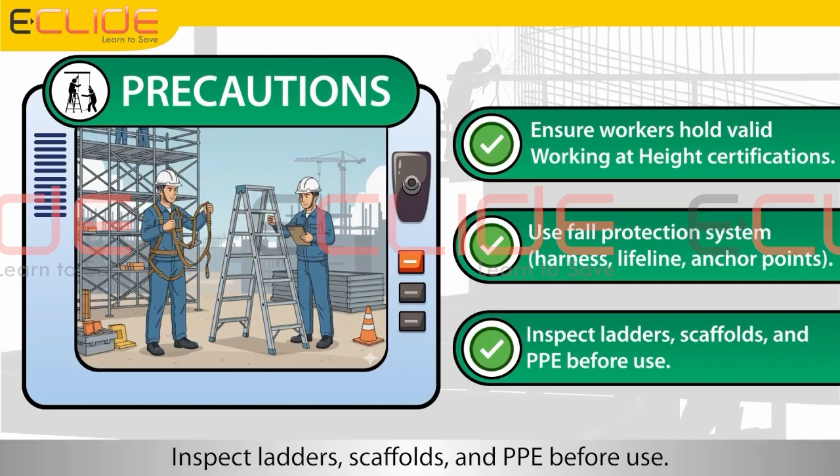Thank you, John, for explaining the hazards. Let us now understand about the precautions during working at height. Ensure workers hold valid working at height certifications. Use fall protection system, harness, lifeline, anchor points. Inspect ladders, scaffolds, and PPE before use. Ensure guardrails and toe boards are in place. Keep working surfaces clean and dry. Secure tools and materials to prevent falling objects. Avoid working at height in bad weather. Provide training and supervision for workers. Ensure proper lighting and visibility. Ensure a dedicated rescue team on standby. Maintain clear communication system. Follow permit to work system for high-risk tasks.

Now we will understand about do's and don'ts during working at heights, and we can carry out the work safely. To begin, John, can you explain about various do's? Yes, Lisa, let me explain about the do's during working at height.

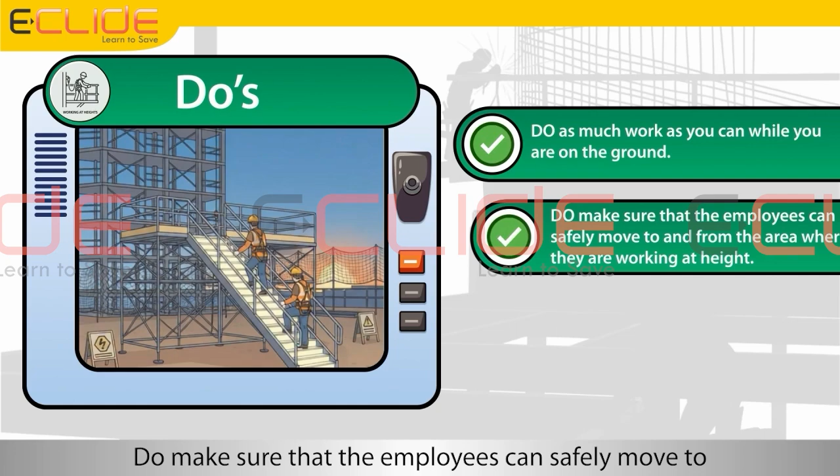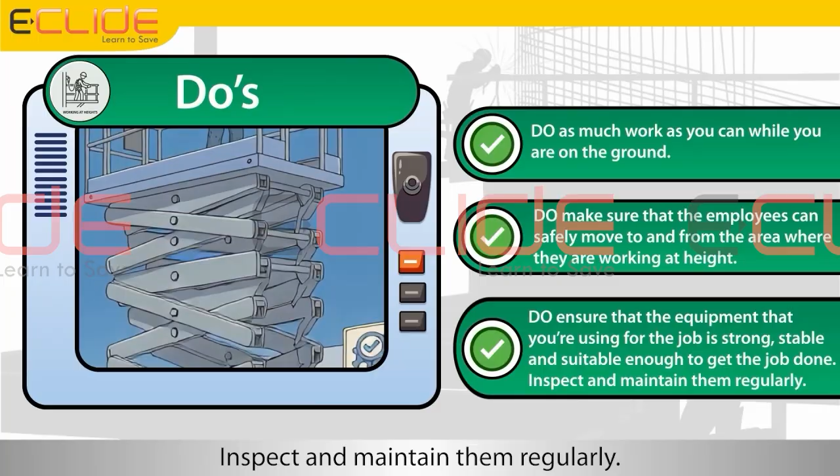Do as much work as you can while you are on the ground. Do make sure that employees can safely move to and from the area where they are working at height. Do ensure that the equipment you're using for the job is strong, stable and suitable enough to get the job done. Inspect and maintain them regularly. Do be careful when working near a fragile surface. Do ensure that you are protected from falling objects. Do make preparations for emergency evacuations and rescues.

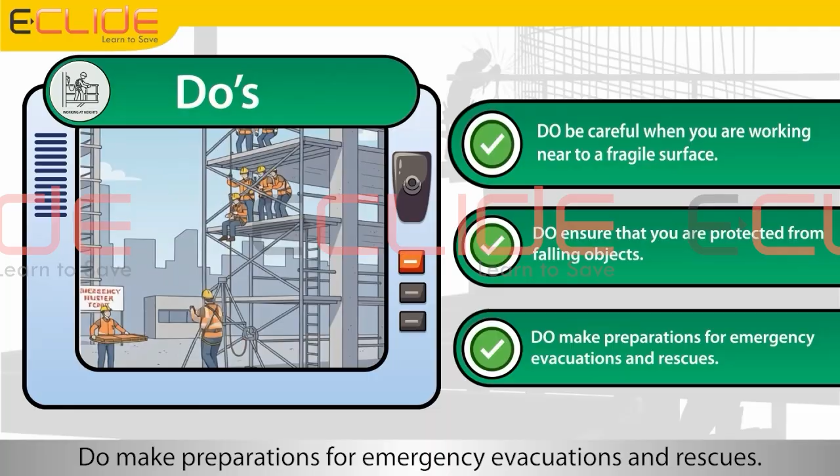Thank you, John, for explaining the do's. Let us now understand about the don'ts during working at heights.

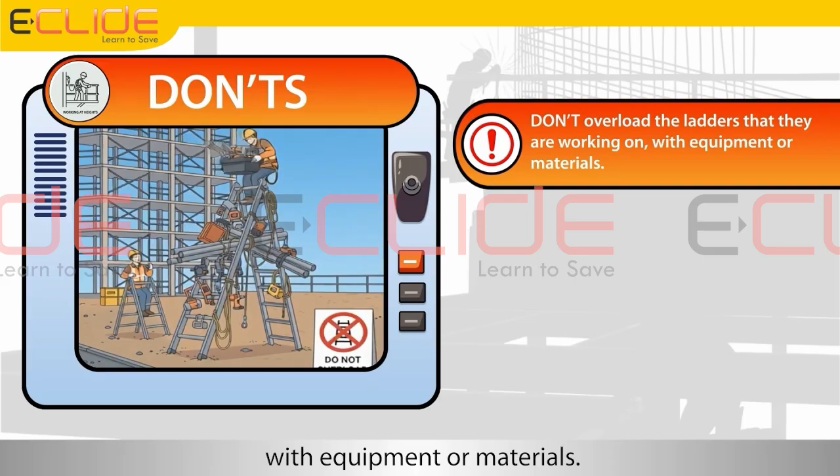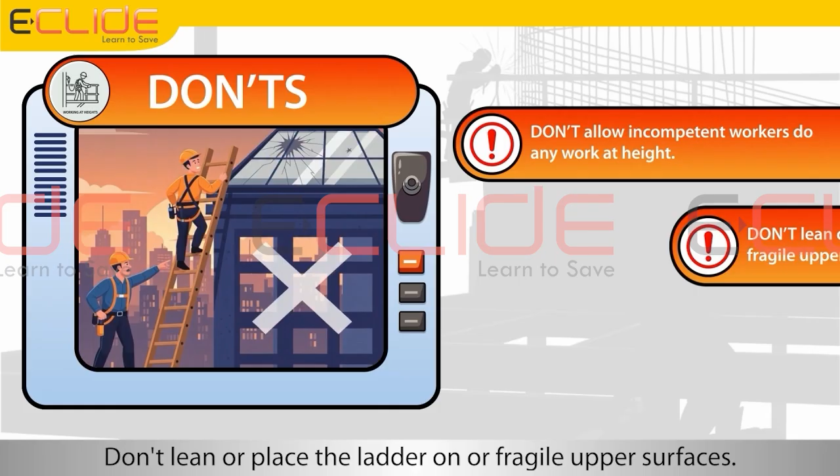Don't overload the ladders that you are working on with equipment or materials. Don't try to reach too far when you're on a ladder or stepladder. Don't use ladders or stepladders to do work that entails heavy or strenuous tasks. Only use them to do work that's quick and light. Don't allow incompetent workers to do any work at height. Don't lean or place the ladder on fragile upper surfaces. Don't stay quiet when you feel someone is compromising their own safety or the safety of others.

Hey, John, now we will learn how to stay safe during excavation and trenching work. Yes, Lisa, let's start first with hazards and precautions of excavation and trenching work. Let us learn how to stay safe during work involving digging, trenching, or excavation near pipelines, cables, or underground utilities. We will understand about hazards and precautions during excavation and trenching safety, and we can carry out the work safely. To begin, John, can you explain about various hazards?

Yes, Lisa. Let me explain about the hazards during excavation and trenching. Collapse of trench walls, cave-ins. Contact with underground utilities, gas, electricity, water. Falling objects or materials into excavation. Hazardous gases or oxygen deficiency in deep excavations. Flooding from groundwater or rain. Workers or equipment falling into trench. Heavy equipment operating too close to edge. Vibration from traffic causing collapse. Poor access or egress, no safe ladders or ramps. Inadequate shoring, shielding, or trench support. Lack of inspection by competent person.

Thank you, John, for explaining the hazards. Let us now understand about the precaution during excavation and trenching.

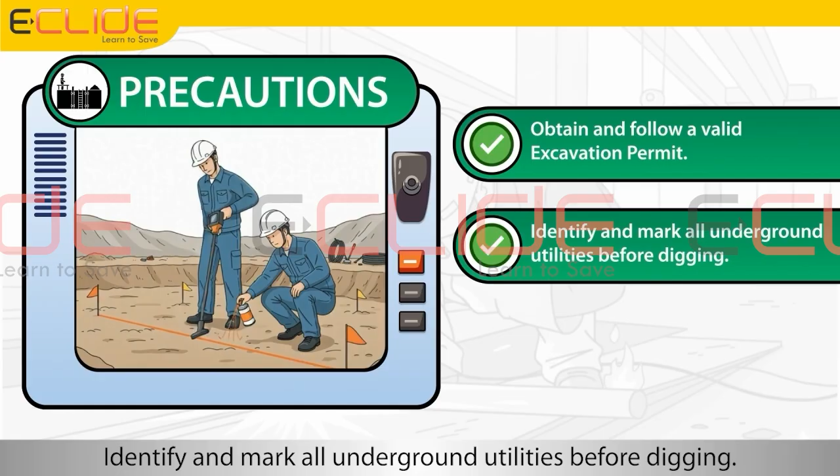Obtain and follow a valid excavation permit. Identify and mark all underground utilities before digging. Provide proper shoring, shielding, or benching. Keep excavated materials at least 1 meter from trench edge. Test atmosphere for hazardous gases or oxygen levels.

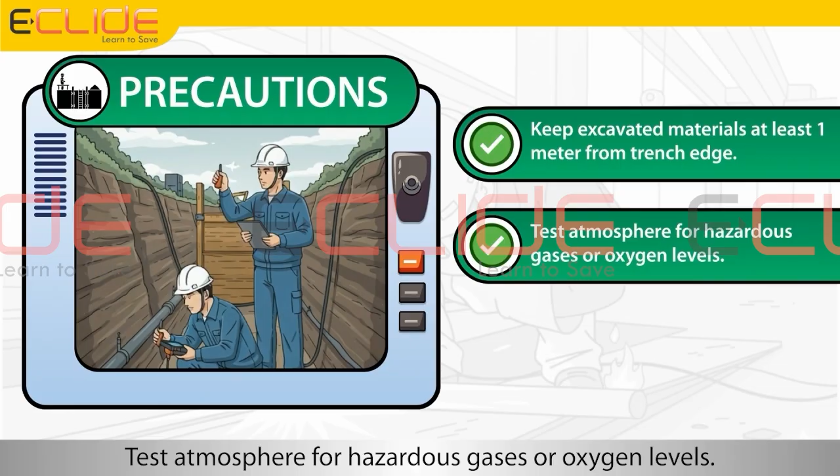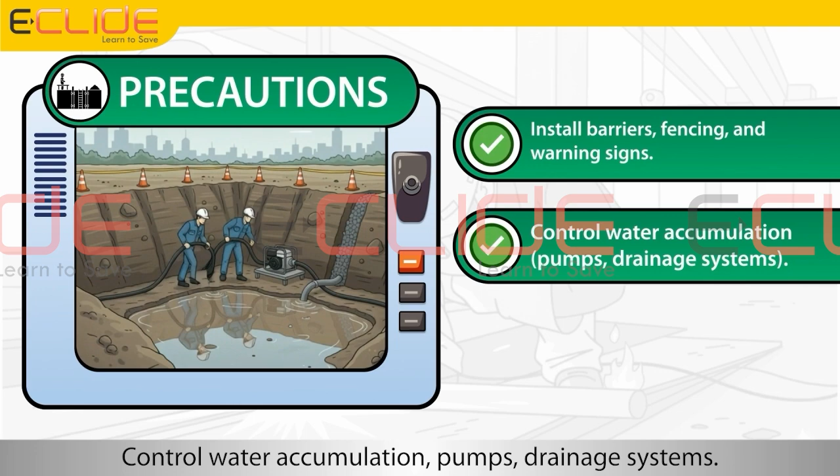Provide safe access or egress every 7.5 meters. Install barriers, fencing, and warning signs. Control water accumulation with pumps and drainage systems. Maintain safe distance of heavy equipment from edges. Conduct frequent inspections by a competent person. Provide proper PPE and prepare an emergency or rescue plan.

Now we will understand about do's and don'ts during excavation and trenching, so we can carry out the work safely. To begin, John, can you explain about various do's? Yes, Lisa, let me explain about the do's during excavation and trenching.

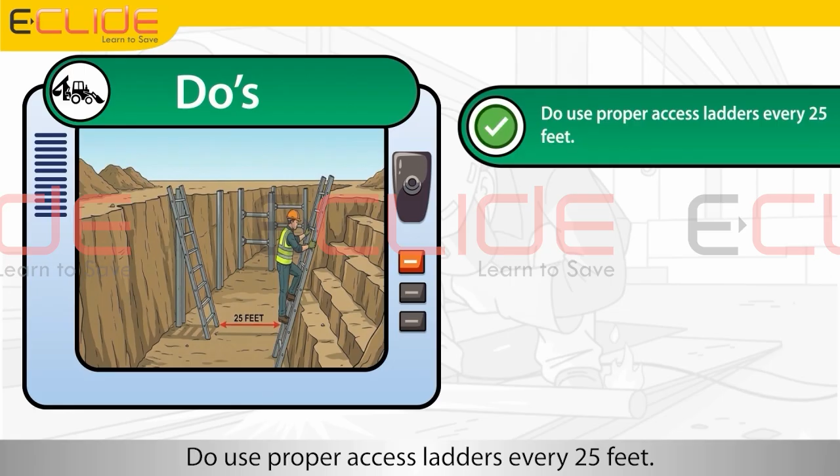Do inspect trenches daily before work. Do use shoring, shielding, or benching. Do keep spoil piles 2 feet from edges. Do use proper access ladders every 25 feet. Do check for water accumulation. Do identify underground utilities before excavation. Do assign a competent person for supervision.

Thank you, John, for explaining the do's. Let us now understand about the don'ts during excavation and trenching safety use.

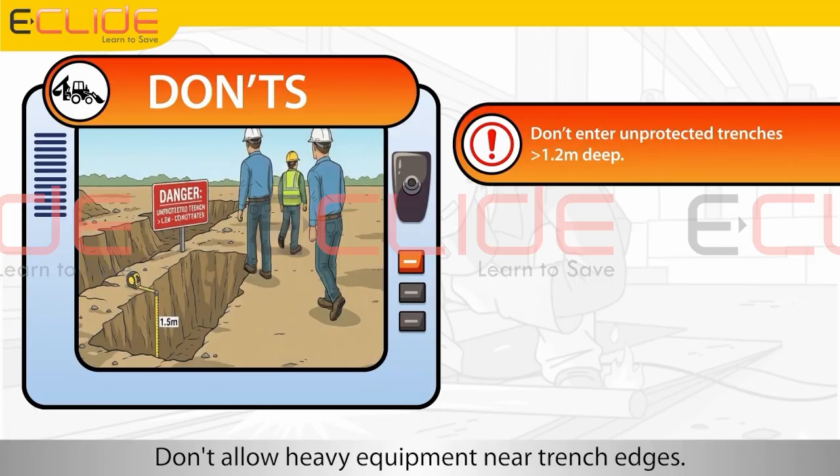Don't enter unprotected trenches greater than 1.2 meters deep. Don't allow heavy equipment near trench edges. Don't ignore cracked or sloughing soil. Don't jump across trenches. Don't allow workers to stand under loads. Don't store materials at the edge of trenches. Don't work during heavy rain in open trenches.

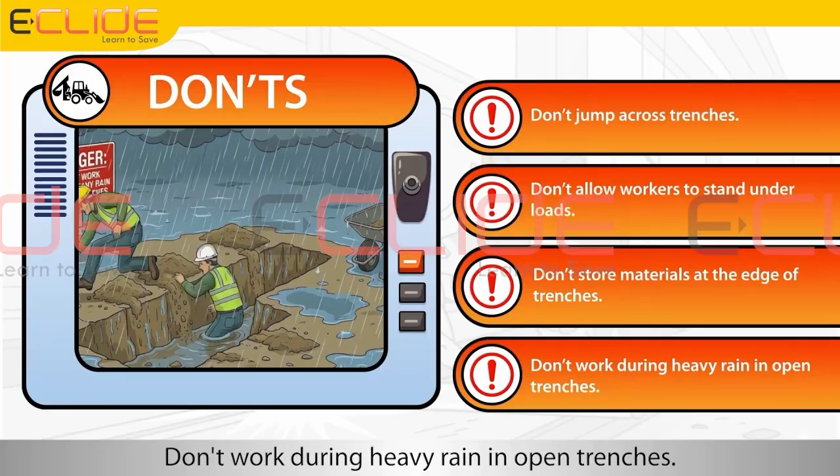John, now let's learn how to stay safe during ladder use. Yes, Lisa, let's begin with hazards and precautions of ladder use. We will understand about hazards and precautions during ladder use, so we can carry out the work safely. To begin, John, can you explain about various hazards? Yes, Lisa, let me explain about the hazards during ladder use.

Ladder slipping due to unstable surface. Overreaching causing falls. Using damaged or defective ladders. Electrical contact when using metal ladders. Falling objects from height.

Thank you, John, for explaining the hazards. Let us now understand about the precaution during ladder use.

Ensure the ladder is placed on firm, level ground. Maintain 3-point contact at all times. Inspect the ladder for cracks, loose rungs, or defects before use. Keep ladder angle at a 4:1 ratio. Use a non-conductive ladder near electrical work. Do not overreach, move the ladder instead. Secure the ladder at the top where possible.

Now we will understand about do's and don'ts during ladder use, so we can carry out the work safely. To begin, John, can you explain about various do's? Yes, Lisa, let me explain about the do's during ladder use.

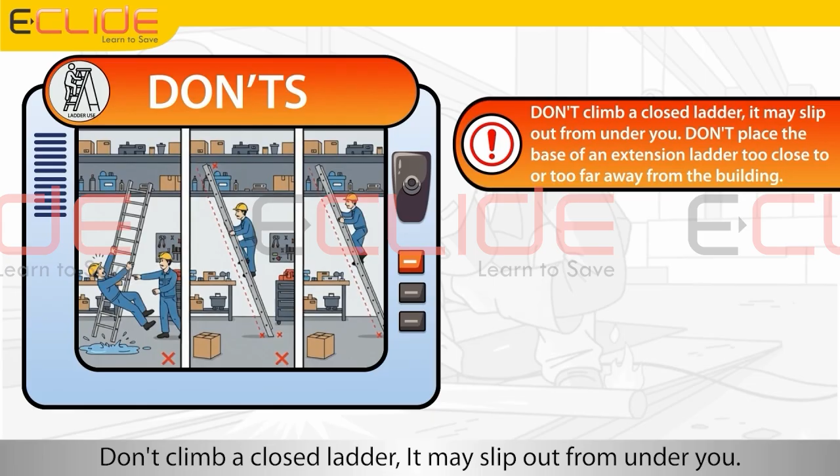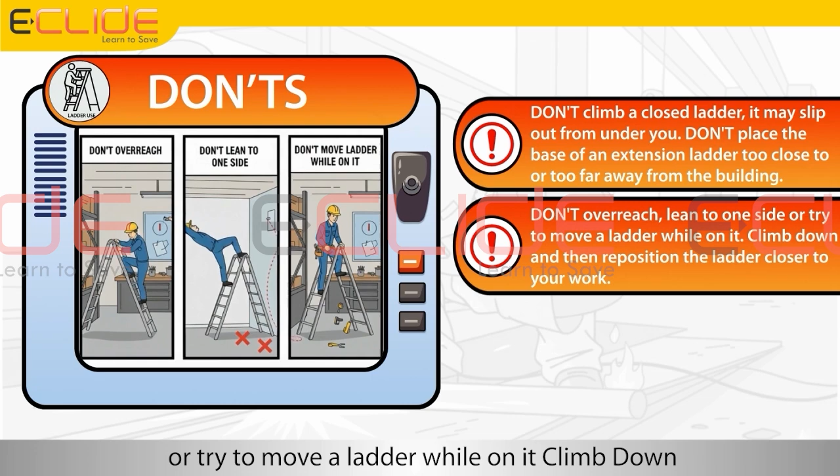Don't climb a ladder if you are not physically and mentally up to the task. Don't climb a closed ladder, it may slip out from under you. Don't place the base of an extension ladder too close to or too far away from the building. Don't overreach, lean to one side, or try to move a ladder while on it. Climb down and then reposition the ladder closer to your work.

Don't exceed the maximum load capacity or duty rating of a ladder. Don't permit more than one person on a stepladder or an extension ladder.

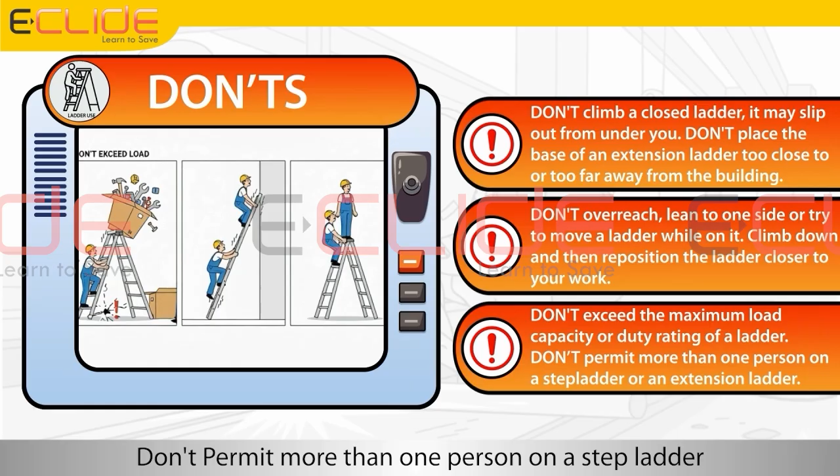John, now let's understand how to stay safe during confined space work. Yes, Lisa. Let's start with hazards and precautions of confined space work. Let us learn how to stay safe during any area with limited entry or exit not designed for continuous occupancy, for example tanks, silos, sewers. We will understand about hazards and precautions during confined space work, and we can carry out the work safely. To begin, John, can you explain about various hazards?

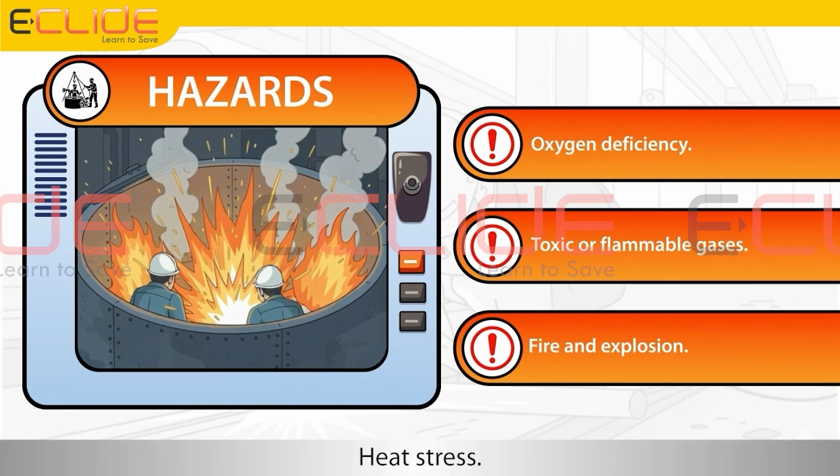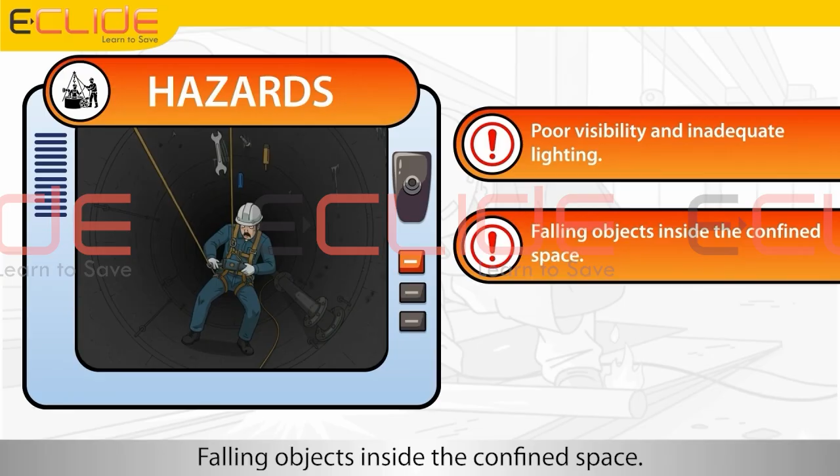Yes, Lisa. Let me explain about the hazards during confined space: oxygen deficiency, toxic or flammable gases, fire and explosion, heat stress, limited movement or entrapment, noise and vibration, poor visibility and inadequate lighting, falling objects inside the confined space, slips, trips, and falls, panic or disorientation due to poor communication.

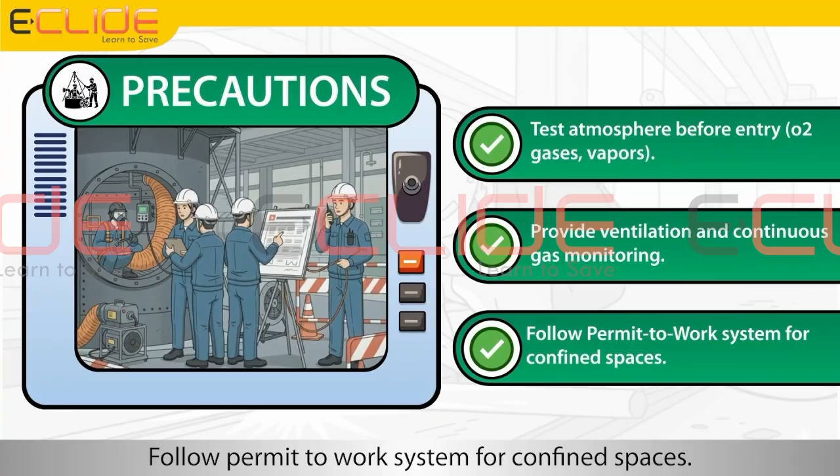Thank you, John, for explaining the hazards. Let us now understand the precautions during confined space work. Test the atmosphere before entry: O2, gases, vapors. Provide ventilation and continuous gas monitoring. Follow the permit to work system for confined spaces.

Now we will understand the do's and don'ts during confined space work, so we can carry out the work safely. To begin, John, can you explain about various do's? Yes, Lisa, let me explain about the do's during confined space work.

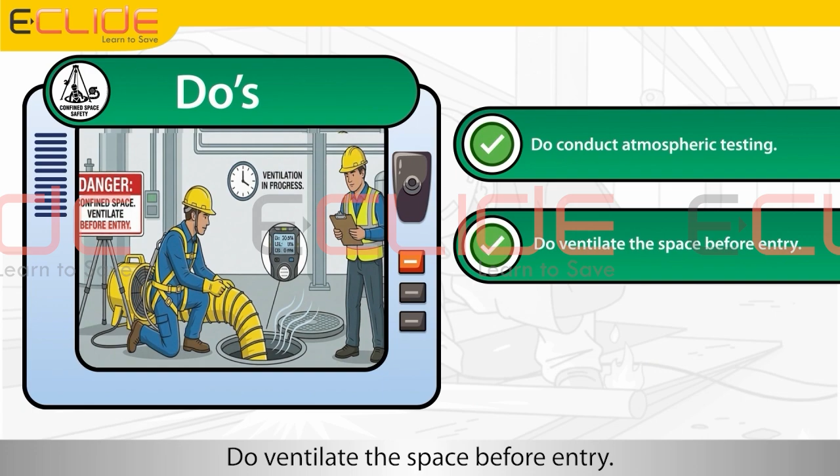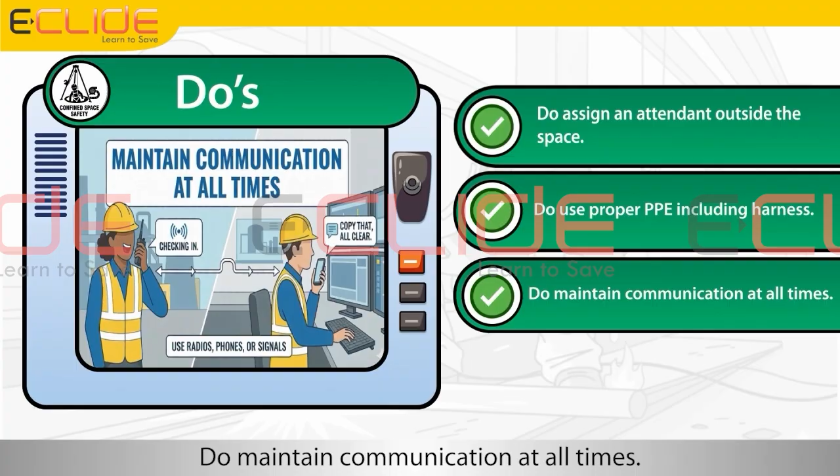Do conduct atmospheric testing. Do ventilate the space before entry. Do use an entry permit system. Do assign an attendant outside the space. Do use proper PPE including harness. Do maintain communication at all times. Do have rescue equipment ready. Thank you, John, for explaining the do's.

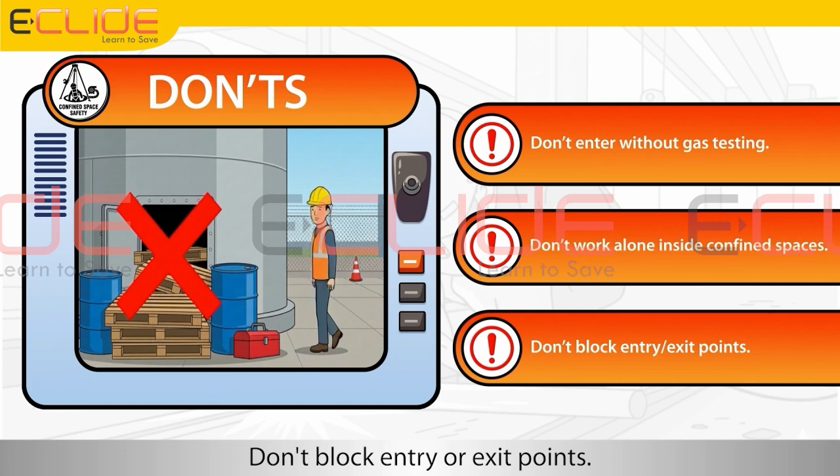Let us now understand the don'ts during confined space safety. Don't enter without gas testing. Don't work alone inside confined spaces. Don't block entry or exit points. Don't ignore alarms or detector readings. Don't remove ventilation during work. Don't use ignition sources in flammable spaces. Don't exceed occupancy limits.

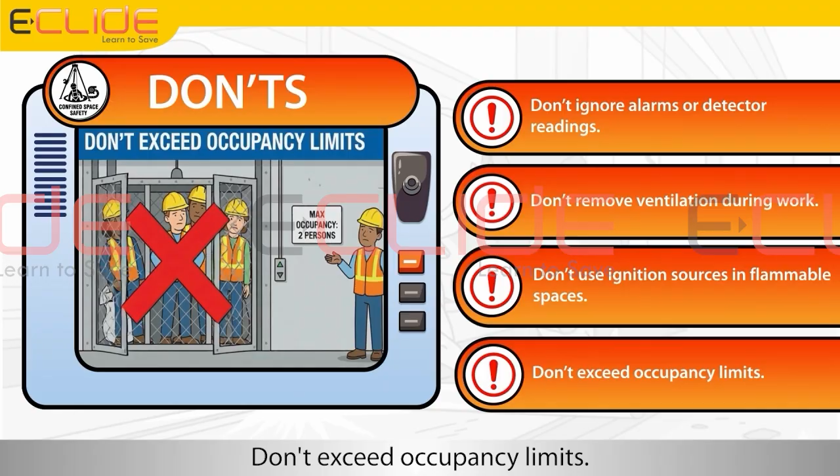Hey, John, let's understand now about how to stay safe during lifting operation work. Yes, Lisa. Let's start with hazards and precautions of lifting operation work. Let us learn how to stay safe during lifting operations, any operation using crane, hoist, or lifting equipment to move a load. We will understand about hazards and precautions during lifting operations, and we can carry out the work safely. To begin, John, can you explain about various hazards?

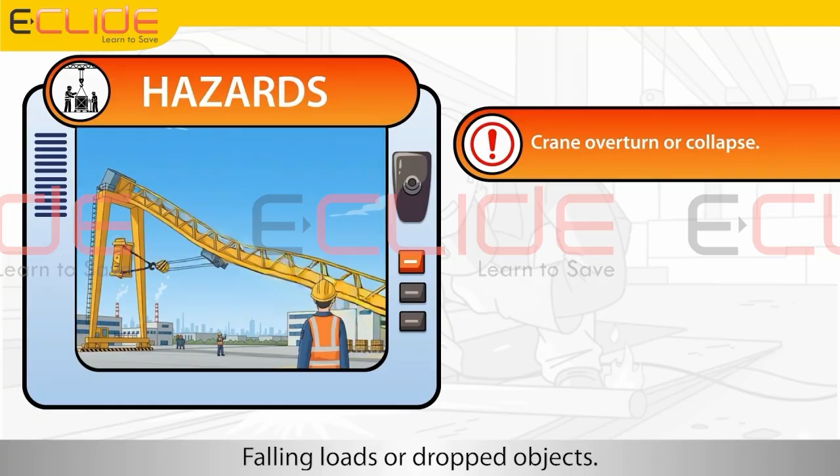Yes, Lisa. Let me explain about the hazards during lifting operation: crane overturn or collapse, falling loads or dropped objects, swinging or unstable loads, equipment failure such as wire rope, hook, or sling, pinch injuries, unauthorized personnel in the lifting area, weather conditions like wind and poor visibility, and inadequate training or certification.

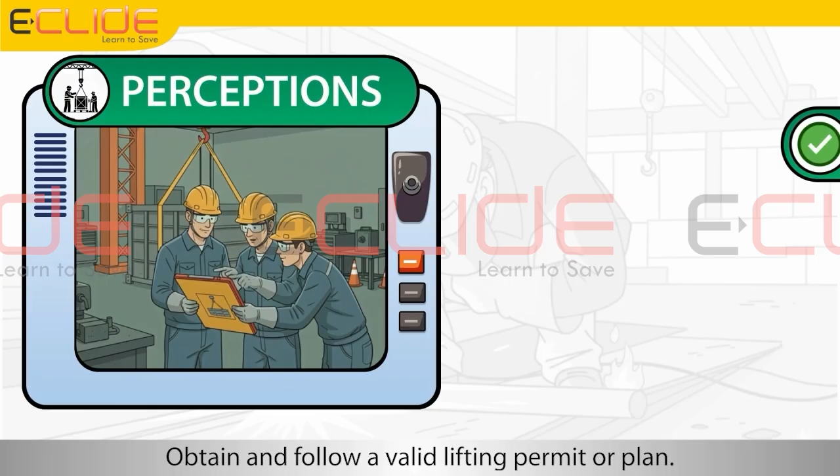Thank you, John, for explaining the hazards. Let us now understand the precautions during lifting operations. Obtain and follow a valid lifting permit or plan. Use certified lifting equipment and accessories with SWL clearly marked. Conduct pre-use inspection of crane, slings, hooks, and shackles.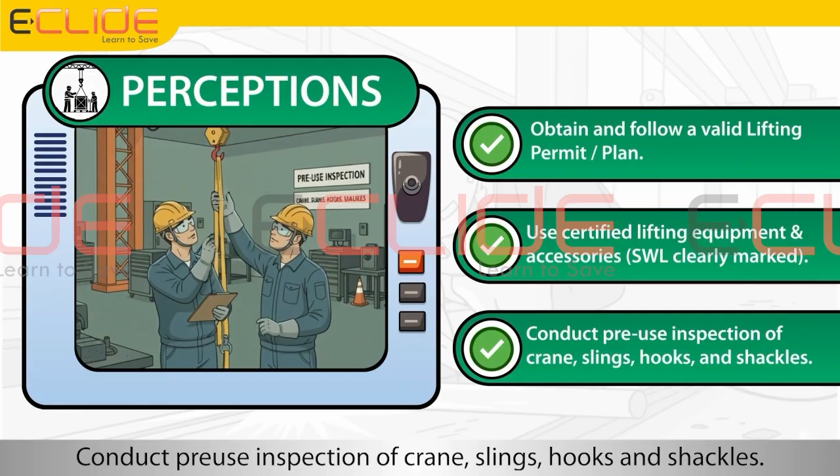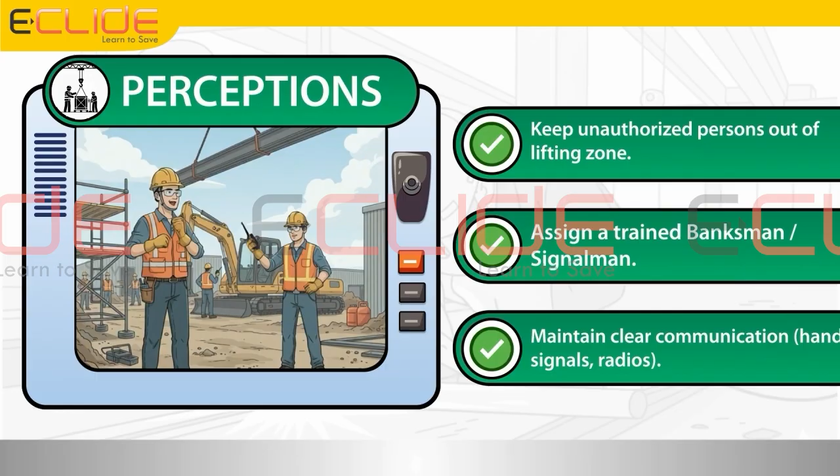Keep unauthorized persons out of the lifting zone. Assign a trained banksman or signalman. Maintain clear communication using hand signals or radios. Monitor weather conditions and stop work in high winds. Secure the load properly with slings, shackles, and tag lines. Establish and communicate a clear emergency or rescue plan.

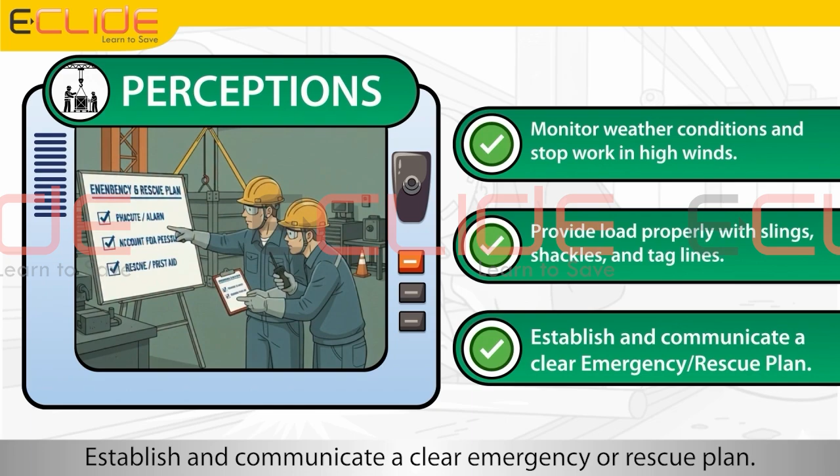Now we will understand the do's and don'ts during lifting operations, so we can carry out the work safely. To begin, John, can we explain about various do's? Yes, Lisa, let me explain about the do's during lifting operations. The operator must check the hoisting equipment and jib crane daily before operation.

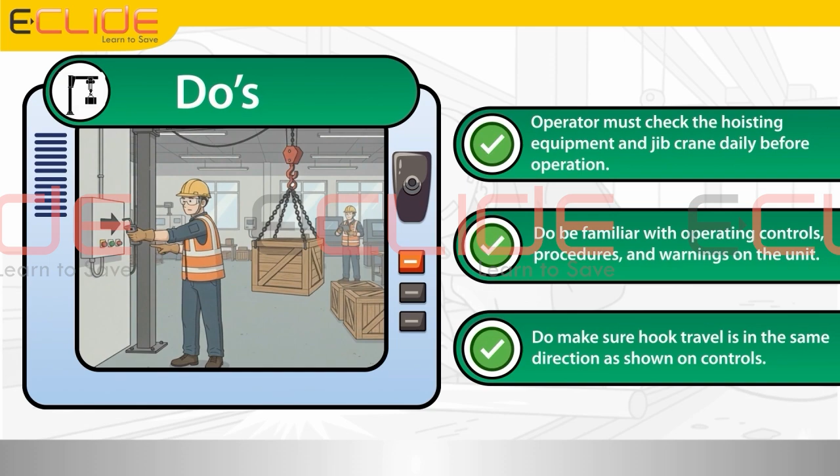Do be familiar with operating controls, procedures, and warnings on the unit. Do make sure hook travel is in the same direction as shown on controls. Do make sure hoist limit switches function properly. Do maintain firm footing when operating hoist. Do make sure that load slings or other approved single attachments are properly sized and seated in the hook saddle.

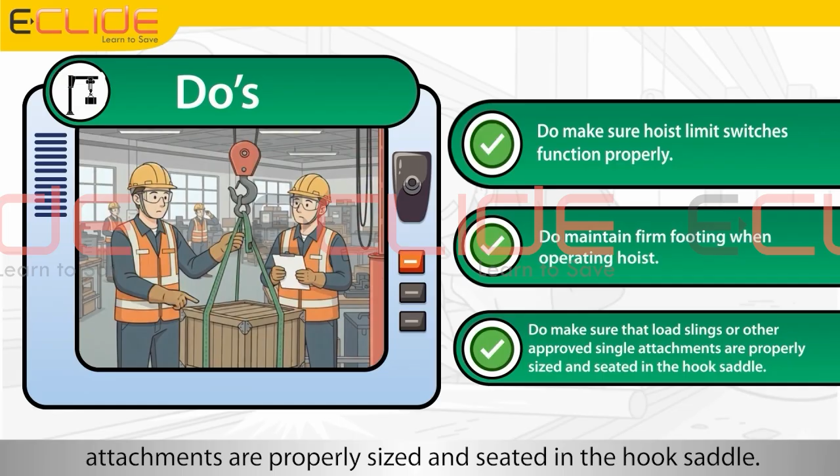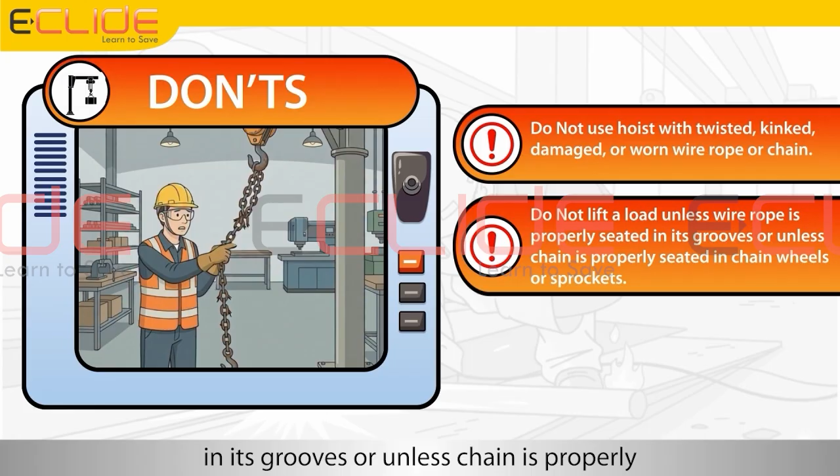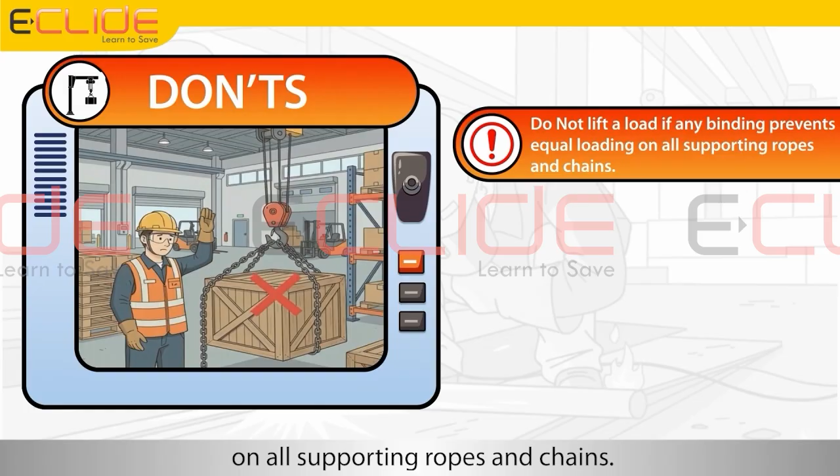Thank you, John, for explaining the do's. Let us now understand about the don'ts during hoisting operation jib crane. Do not lift more than the rated load. Do not use hoist load limiting device to measure the load. Do not use damaged hoist or hoist that is not working correctly. Do not use hoist with twisted, kinked, damaged, or worn wire rope or chain. Do not lift a load unless wire rope is properly seated in its grooves or unless chain is properly seated in chain wheels or sprockets. Do not use load rope or load chain as a sling or wrap load rope or load chain around the load. Do not lift a load if any binding prevents equal loading on all supporting ropes and chains. Do not apply the load to the tip of the hook. Do not operate unless load is centered under the hoist.

Hey, John, now let's understand about how to stay safe during hot work. Yes, Lisa, let's start with hazard and precautions of hot work. Let us learn how to stay safe during hot work, any task like welding, cutting, or grinding that produces heat, sparks, or open flames. We will understand about hazards and precautions during hot work so we can carry out the work safely. To begin, John, can we explain about various hazards? Yes, Lisa. Let me explain about the hazards during hot work.

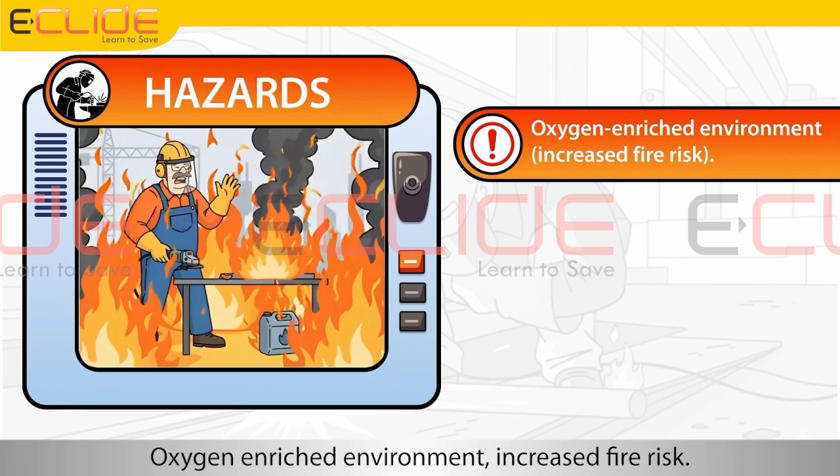Fire and explosion. Flammable gases, vapors, and liquids. Sparks igniting combustible materials. Burns and heat stress. Toxic fumes and smoke inhalation. Eye injuries from UV light, sparks, or hot metal. Oxygen-enriched environment, increased fire risk. Poor ventilation. Noise from cutting and grinding. Lack of fire watch or inadequate supervision.

Thank you, John, for explaining the hazards. Let us now understand about the precautions during hot work. Obtain and follow a valid hot work permit. Inspect work area and remove combustible materials. Use fire-resistant blankets or barriers. Provide adequate ventilation and gas monitoring. Use proper PPE: face shield, safety goggles, heat-resistant gloves, flame-resistant FR clothing, FFP3 respirators for fumes and smoke. Keep fire extinguishers readily available. Assign a trained fire watch during and after work. Limit noise exposure and use hearing protection.

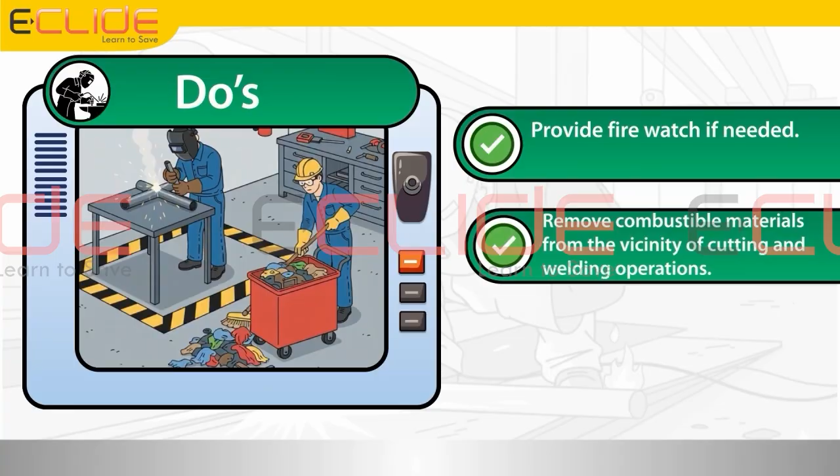Now we will understand about do's and don'ts during hot work so we can carry out the work safely. To begin, John, can we explain about various do's? Yes, Lisa, let me explain about the do's during hot work. Wear required personal protective equipment, PPE. Protect other workers from flashes. Have an adequate fire extinguisher readily available. Provide fire watch if needed. Remove combustible materials from the vicinity of cutting and welding operations.

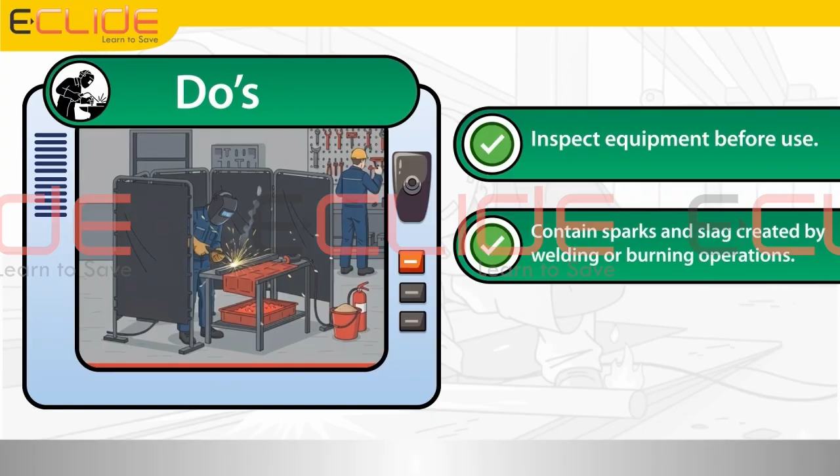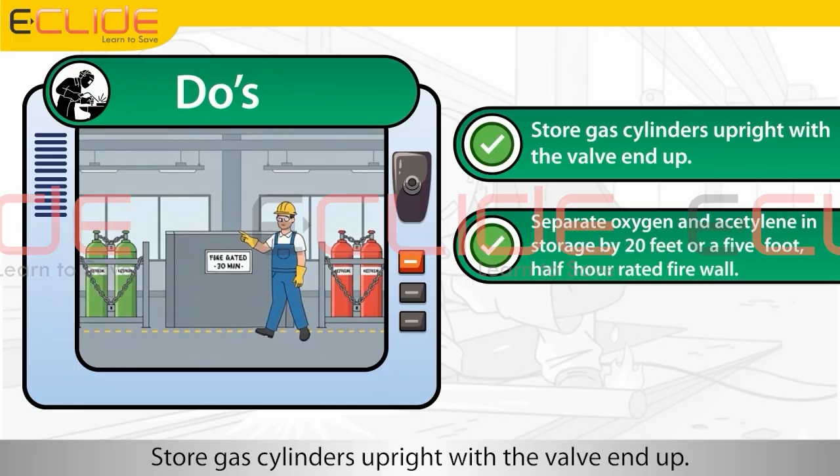Secure all connections, couplings and fittings on your rig. Inspect equipment before use. Contain sparks and slag created by welding or burning operations. Protect welding leads and burning hoses by covering or suspending. Store gas cylinders upright with the valve end up. Separate oxygen and acetylene in storage by 20 feet or a 5-foot, half-hour rated firewall. Clear debris from work area after work is completed.

Thank you, John, for explaining the do's. Let us now understand about the don'ts during welding and cutting. Do not cut or weld in an area with oily rags, dust or other combustible material nearby. Do not weld in an area unless other workers have a welding screen to protect them from the welding arc. Do not transport bottles with gauges installed. Do not use worn cable. Do not use worn hoses. Do not wear clothes of synthetic fabrics. Do not assist anyone cutting or welding unless you are wearing eye protection.

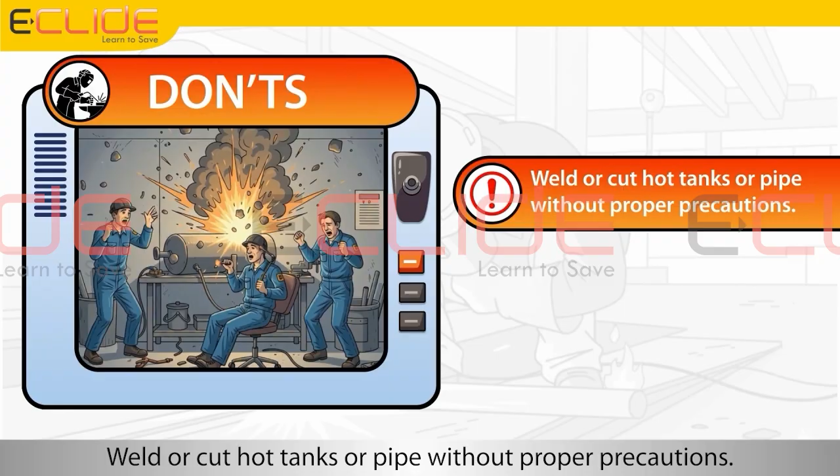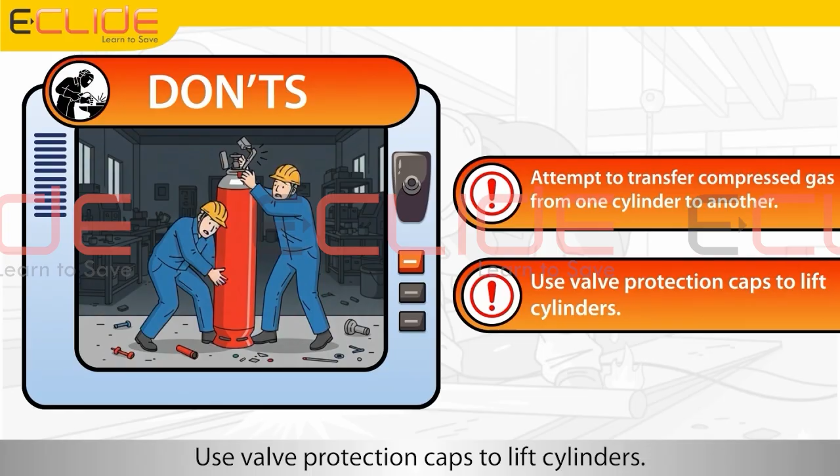Do not leave your area of work without notifying others of the burn hazard. Do not work in an area that is not grounded. Do not weld or cut hot tanks or pipe without proper precautions. Do not run welding leads and burning hoses through doorways. Do not attempt to transfer compressed gas from one cylinder to another. Do not use valve protection caps to lift cylinders. Remember, every hazard and precaution, and every do's and don'ts, count to stay safe.